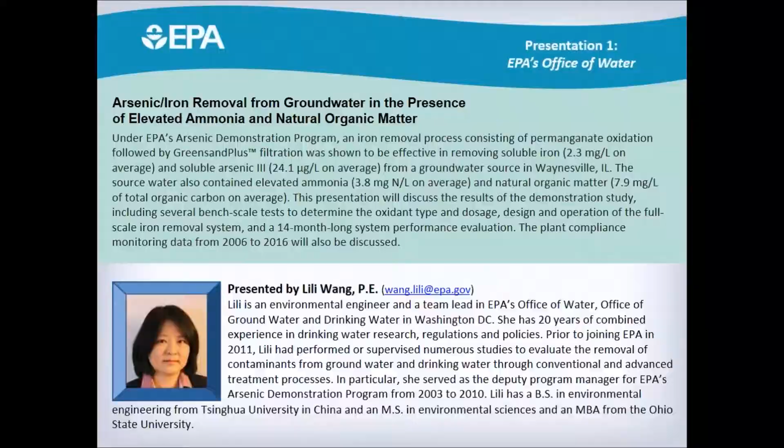Okay, great. Can you hear me, Anna? Yes, I can. Okay, well, thank you very much for the introduction, Tom, and also thank you for the opportunity to speak at this webinar. Congratulations on the successful Small Systems workshop last week. I know there were a lot of good talks, and I looked at the slides and I saw some good talks on the iron and manganese removal given at the workshop.

And so what I'm going to present today is some case studies from the arsenic demonstration program to give you an idea of how some of the optimization strategies talked about last week can be implemented in the field. And this is the work I did before I joined EPA in 2011. So I start off with some background information and the design considerations for how to address ammonia and TOC in the water. And then I will talk about some bench scale tests and a year-long full-scale system performance evaluation study at a site in Illinois. And then I will finish up with some conclusions.

Some of you may have heard about this EPA arsenic demonstration program from previous webinars. It included 50 sites in 26 states, initiated shortly after EPA lowered the arsenic standard from 50 to 10 microgram per liter in 2001. The program took about 8 years to complete, from 2003 to 2011, and its purpose was to help small systems comply with the new arsenic standard.

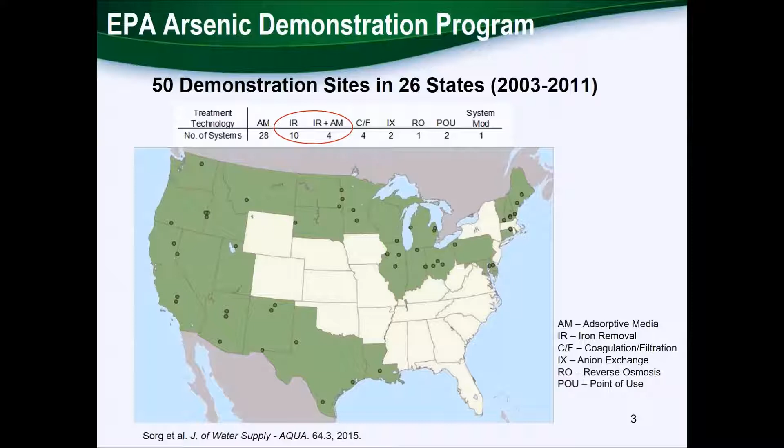Each dot on this map represents a demonstration site. There are a number of different technologies being demonstrated, including adsorptive media, iron removal, coagulation filtration, anion exchange, reverse osmosis, and point of use. As you can see on the top of this map, iron removal is the second most frequently used technology, being demonstrated at 14 of the 50 sites.

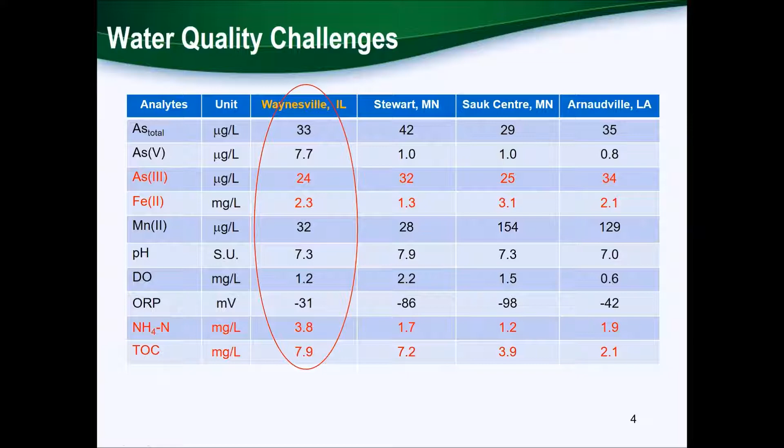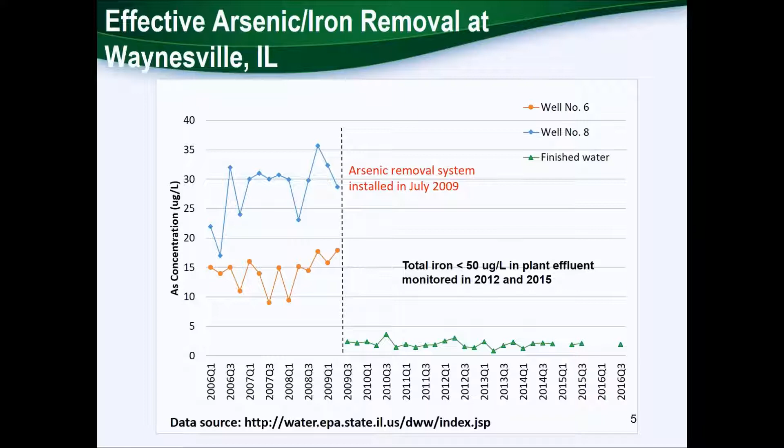Also, the sampling frequency was changed from the previous quarterly sampling to yearly sampling starting January 2015. They also monitor total iron, once every 3 years. So I only have this 2 pieces of data for total iron, but they are all below 50 microgram per liter in the plant effluent, monitored in 2012 and 2015. So the iron removal system seems to be doing pretty well in terms of removing arsenic and iron at this site.

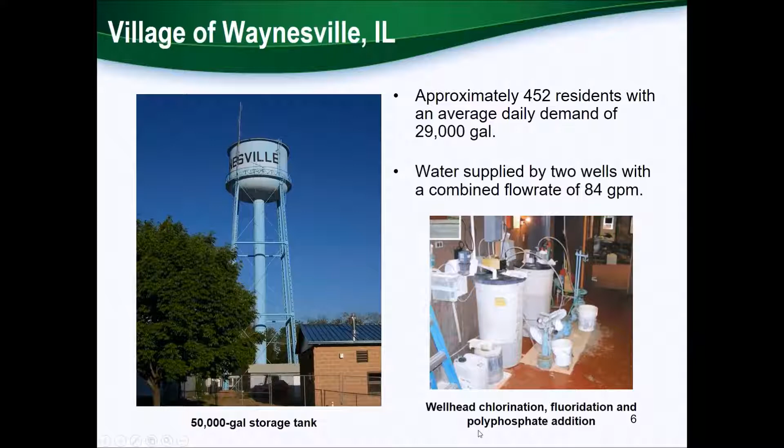So next, I'm going to go into more details about this study. The village of Waynesville, Illinois, has 452 residents with an average daily demand of 29,000 gallons. The water was supplied by those 2 wells with a combined flow rate of 84 gallons per minute. Prior to the installation of the treatment system, they only had wellhead chemical addition, including chlorination, fluoridation, and polyphosphate addition.

This next slide will talk about some design considerations. The first is about what oxidant is good for this kind of water. We all know that air is very effective for iron oxidation - that's why most plants use aeration. However, it's not effective for arsenic-3. Also, because this water contains ammonia, chlorine is not a good choice either, because chlorine reacts with ammonia to form chloramines, and chloramines are not effective for arsenic-3 oxidation either.

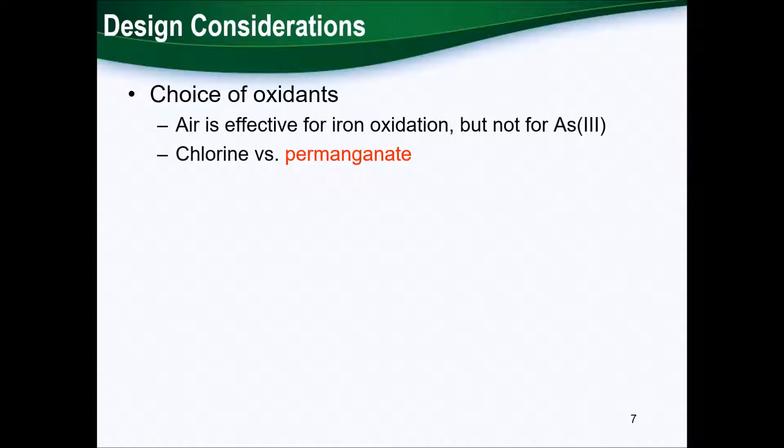That kind of leaves... also, breakpoint chlorination is not practical because the chlorine dose would be very high - at this site it could be as high as 32 milligrams per liter. That could also lead to some DBP formation concerns because the water has very high TOC. So that left us with permanganate, which can effectively oxidize arsenic-3 in the presence of ammonia and also minimize DBP formation.

But permanganate has its own set of challenges, particularly with dosing. If overdosing, then you'll get a pink water issue. If underdosing, then some arsenic-3 and iron-2 may not be completely oxidized. Also, because this water has very high TOC, and TOC would interfere with permanganate oxidation and filtration, it would exert additional demand for the oxidant. But there's no formula to estimate the demand by the TOC.

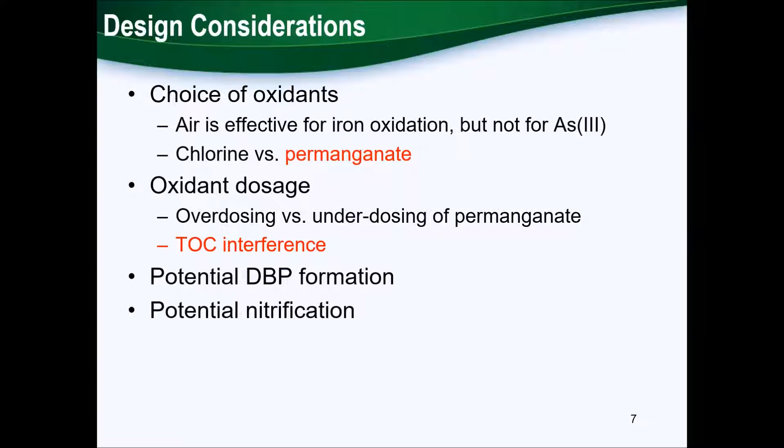In our study, we also purposely avoided aeration to allow arsenic-3 and iron to be oxidized simultaneously for optimum removal. And we also kept the system pressurized to minimize the nitrification.

As I said earlier, we were able to leverage some of the experience from other sites. So I'd like to talk to you a little bit about this Sauk Centre, Minnesota site, which had very similar water quality and also a similar iron removal system using permanganate. We had some very interesting observations here and also learned quite a bit from this system.

Initially, when we started the system, we added about 4 milligrams per liter permanganate, and we were able to oxidize arsenic. We got very good arsenic removal and iron removal. However, we noticed that the manganese level after filtration actually went up—it was higher than what's in the raw water. The raw water had about 150 micrograms per liter manganese.

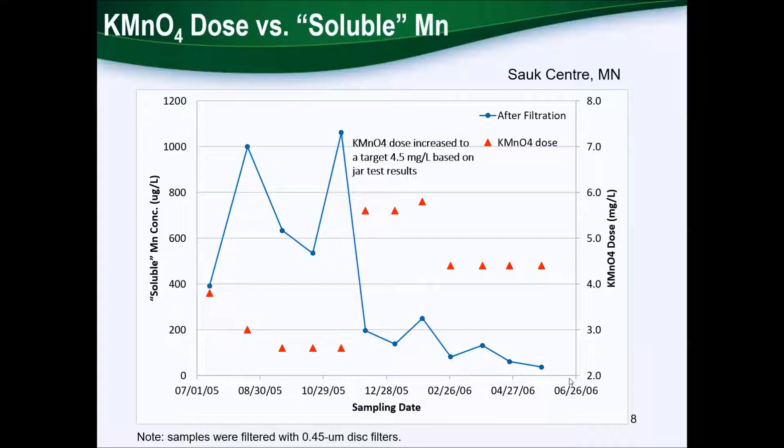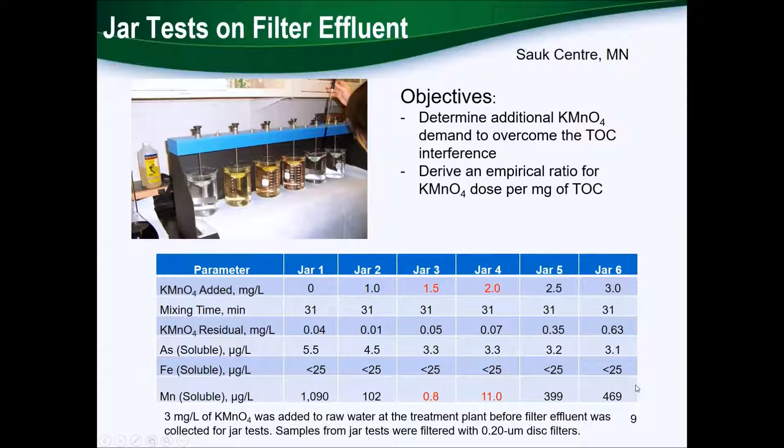So we plotted the manganese data on this graph. As you can see, we determined that the optimum dose for permanganate is between 1.5 and 2; on both sides you're either underdosing or overdosing, and in each scenario you'll have elevated soluble manganese in the finished water. Based on this optimum dose, we also figured out an empirical dose ratio—basically 1.5 or 1.6 divided by the TOC concentration of this water, which is about 4 milligrams per liter, giving us 0.4 milligrams of permanganate per milligram of TOC. That's the empirical ratio we derived based on this water and this jar test.

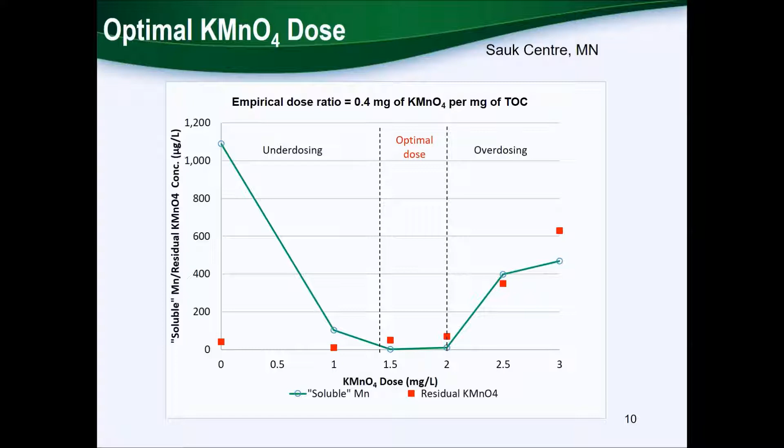We were then able to apply that value to our Waynesville bench tests. For the Waynesville bench test, it's a little different because we did the test before the system was installed to produce any water. We wanted to be more proactive this time, doing the jar test before we start up the system.

So we actually use the bench test to determine the raw water oxidant demand and the proper dose to oxidize arsenic 3 and iron 2, and also to overcome the TOC interference. Another objective is to evaluate the potential for DBP formation.

So we performed this test on site using fresh water from the well. Instead of using the 6-place jar test as we did for the Sauk Centre study, we used 1 liter amber glass bottles as a test apparatus, because we tried to avoid contact with air and preserve that condition.

We also determined the permanganate dose based on the stoichiometric amount. This 2.4 milligram per liter is based on the iron and manganese levels, plus the additional demand by the TOC. We used 0.4, that empirical ratio, multiplied by 9 milligram per liter of TOC, and got 3.6. Adding that to 2.4, we got 6 milligram per liter.

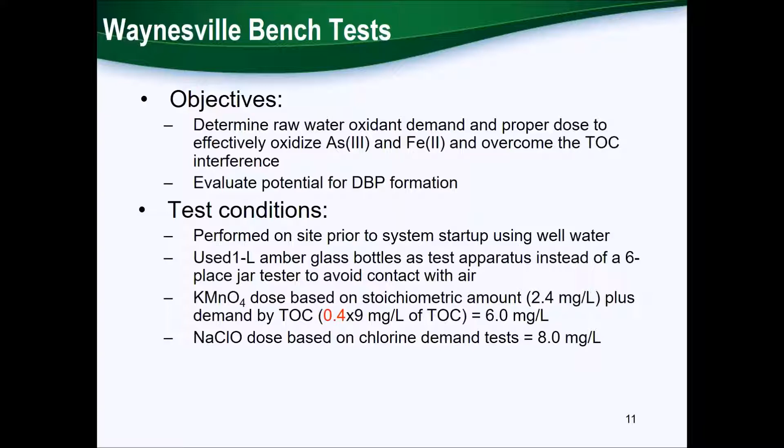Based on those conditions, we did the jar test. As you can see on this slide, we used 20 minutes as a reaction time, but for the sodium hypochlorite we have 2 jars. The second jar is to give more conservative conditions, the purpose being to look at DBP formation, so we used 120 minutes instead of 20 minutes. We also bumped up the oxidant demand from 8 to 10 milligram per liter as chlorine.

At the end of the test, we measured the soluble arsenic. We did arsenic speciation, measured the metal content, and also the DBP in terms of TTHMs and HAA5. As you can see, DBP formation was not an issue for any of these jars.

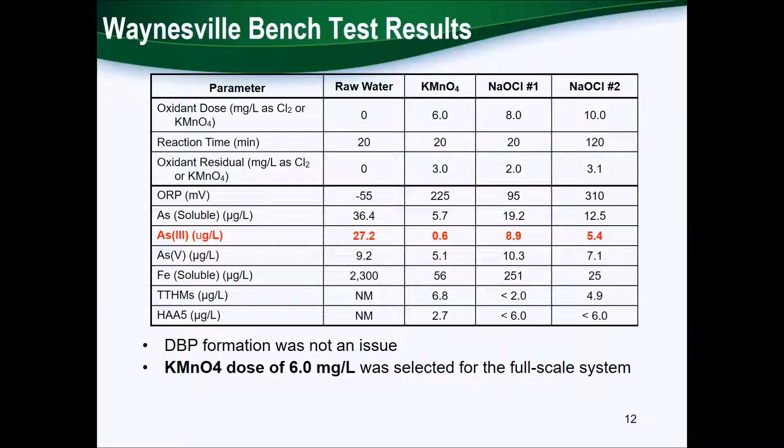The permanganate definitely provides the best results for arsenic-3 oxidation. If you look at chlorine bottle number 1 and number 2, we do have quite a bit of arsenic-3 still existing at the end of the test, indicating that, because this water has ammonia in it, the chloramine forms, again demonstrating that chloramine is not effective for arsenic-3 oxidation.

So with that, I'm going to move on to talk about the full-scale system performance evaluation study, and just very quickly, some pictures of the building construction, and some pictures of the system delivery, offloading, and installation.

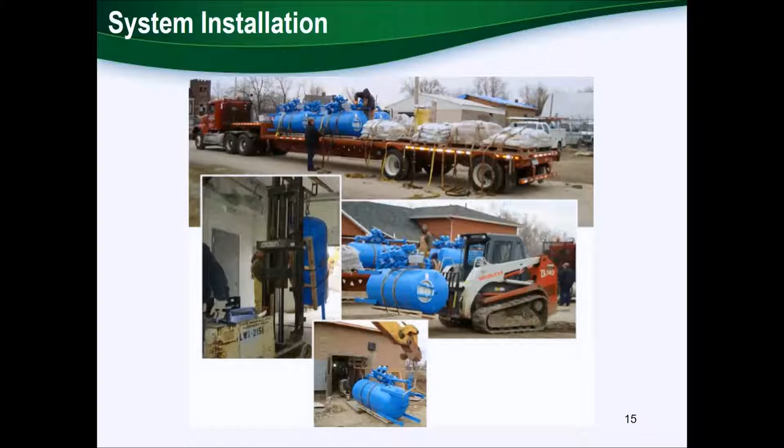The design features: the system was designed at 3.4 gpm per square foot, and it contained 4 vessels, 36-inch diameter by 72-inch tall, and each vessel contained 24-inch of GreensandPlus media, which is basically silica sand coated with manganese dioxide, plus a 12-inch anthracite cap.

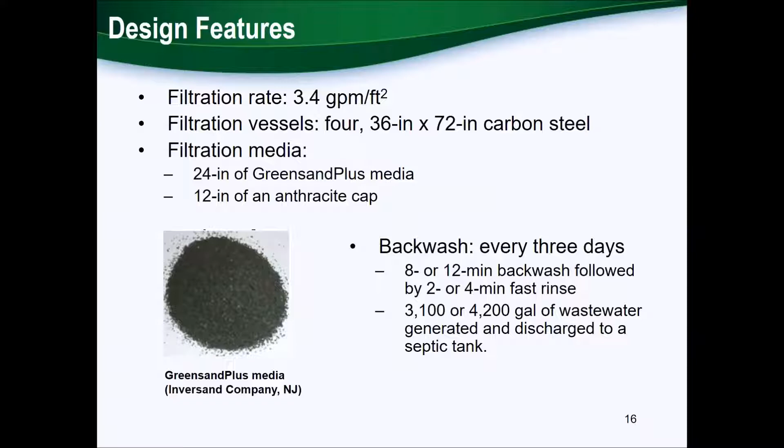Each vessel was backwashed once every 3 days, consisting of 8 minutes of backwash followed by 2 minutes fast rinse initially, and later we extended the time to 12 minutes of backwash and 4 minutes of fast rinse for more thorough backwashing. Each backwash would generate about 3,100 to 4,200 gallons of wastewater, which was discharged to a septic tank on site.

We collected samples on a 4-week cycle. For the first week of the cycle, we did arsenic speciation and a lot more parameters, and for the 3rd week of the cycle, we did just total metal analysis. We also collected samples from the backwash and from the distribution system, but I won't have time to talk about those results.

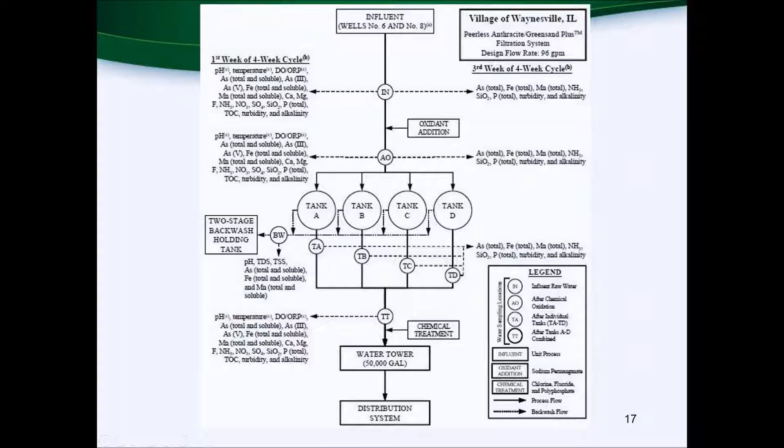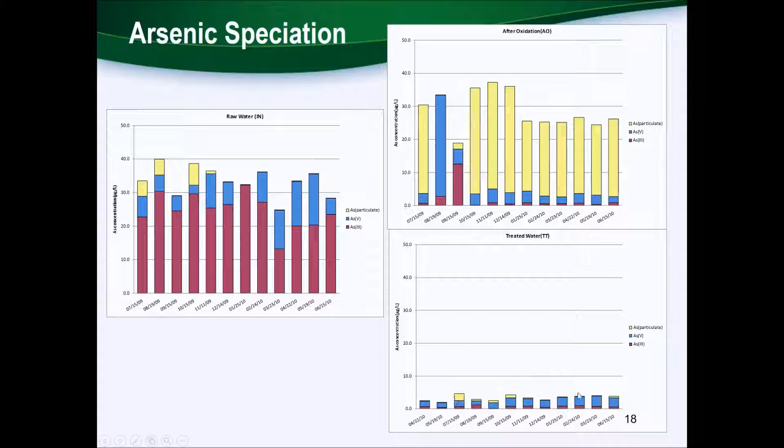This shows the arsenic speciation data for samples collected in the raw water, after oxidation, and the treated water. As you can see, in the raw water, the purple color represents arsenic-3, and the majority is arsenic-3. After oxidation, this yellow color represents particulate arsenic. So the permanganate was very effective at oxidizing arsenic-3 to arsenic-5, and arsenic-5 got adsorbed onto the iron particles. At the treatment location, the arsenic level went down to below 5 microgram per liter.

This graph shows the total arsenic removal; we have a lot more data than the arsenic speciation. Again, the yellow and pink curves represent the raw water and after oxidation, and the blue color represents the arsenic level in the effluent. They're all consistently below 10, and actually below 5 most of the time.

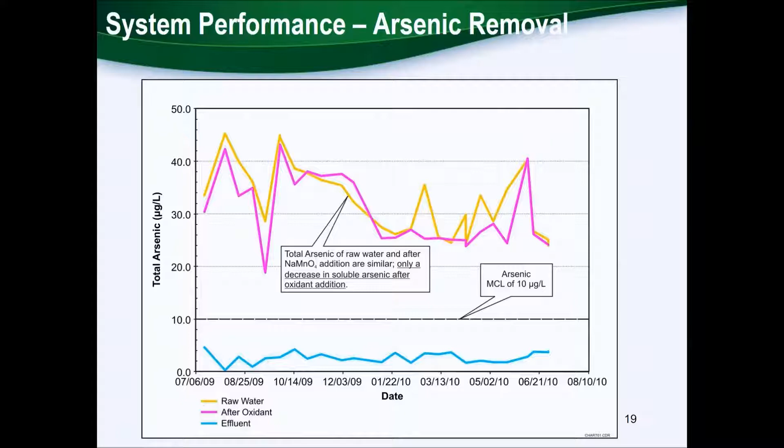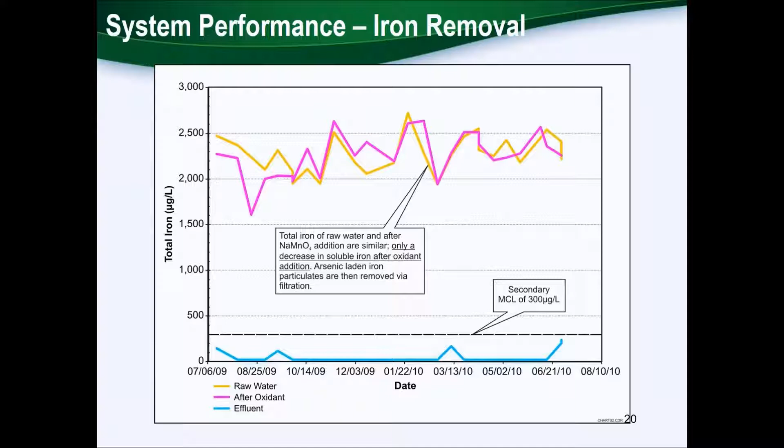And for the iron removal, again, it's very effective. The blue line represents the effluent, and most of the time the iron was below detection of 25 micrograms per liter, just with a few spikes here and there.

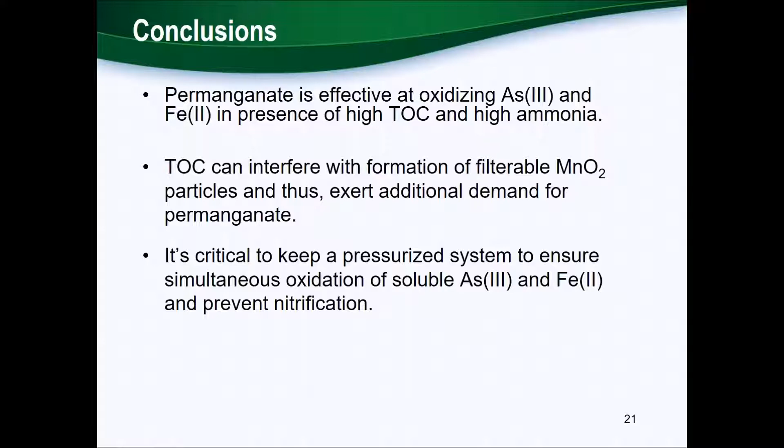I'm going to talk about conclusions real quick. So permanganate is very effective at oxidizing arsenic-3 and iron-2 in the presence of high TOC and high ammonia. TOC can interfere with the formation of filterable manganese dioxide particles and exert additional demand for permanganate. And it's critical to keep a pressurized system to ensure simultaneous

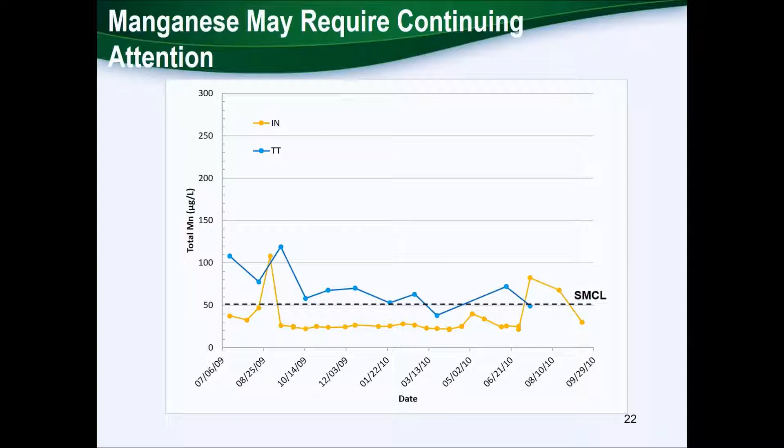We could fine tune the chemical dose or do something else. And I want to use this slide as a segue to Darren's talk about the biological treatment, where I think he had a very good removal on the manganese. So I just want to quickly acknowledge the operators of Waynesville, Illinois, my previous colleagues at Battelle, and also EPA ORD for the funding. Thank you very much.

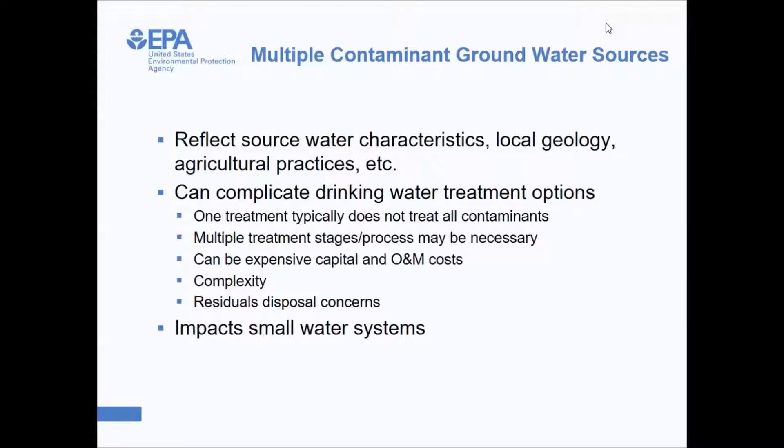So the multiple contaminant scenario that we deal with, I'm going to talk about 4 different contaminants in the same groundwater, but any combination of these could be a challenge in itself. So don't think of what I'm going to talk about as an approach to deal with all 4, but if you have 2 of these or 3 of these, the approach that I'm going to discuss will address any combination.

Ammonia isn't regulated. And for those that have heard me talk over the years, I've been talking quite a bit about ammonia removal and biological treatment to address ammonia removal and why we're concerned about it. It's not directly regulated, but certainly can be a big issue if it enters the distribution system, creating nitrification issues, particularly if the concentration is over 1 milligram per liter, where that 1 milligram per liter of ammonia could go to 1 milligram per liter of nitrite as a result of distribution system nitrification, which exceeds the nitrite standard of 1 milligram per liter.

It can also impact treatment processes. In particular, arsenic removal can be impacted if there's ammonia in the water and you're trying to oxidize arsenic with something like chlorine, which gets tied up with ammonia and forms monochloramine, which is not going to be effective at oxidizing arsenic. So I'll talk about that in a second.

Iron - we have a secondary MCL for iron of 0.3 milligrams per liter because of staining, aesthetic issues, staining of fixtures and faucets and clothes and other things. Red water, as we refer to it sometimes, and it may accumulate contaminants in the distribution system as well. So we want to treat iron and remove it from our water.

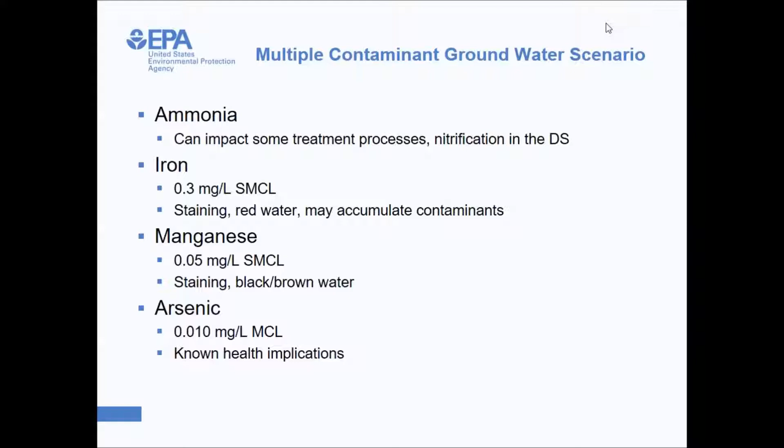So let's look at each contaminant just real briefly and quickly. How do we deal with ammonia?

Well, monochloramine formation is an option, but I would argue that it's difficult to manage because oftentimes ammonia varies in a source water - maybe not so much in the source groundwater well itself, but many communities have multiple wells they draw from, and the wells have different amounts of ammonia, and they're oftentimes switching or rotating combinations of wells. It can be a challenge to keep up with, trying to tie up that ammonia without leaving much of a residual ammonia to go out into the distribution system. And of course, when it does go into the distribution system, it reacts with distribution system materials, corroding pipes and biofilm and everything else that it reacts with. It releases ammonia, so you still have the ammonia out there, and that can be an issue for nitrification problems.

Breakpoint chlorination is certainly an option, but the concern there, particularly with some of the waters we're dealing with now, is they have ammonia concentrations of 2, 3, 4 milligrams per liter - that's a lot of chlorine to add. And then secondly, you raise the concerns of DBP issues. Biological treatment, of course, that's what I'm going to talk about and highlight. And then there are others - ion exchange, RO, other chemical oxidation processes.

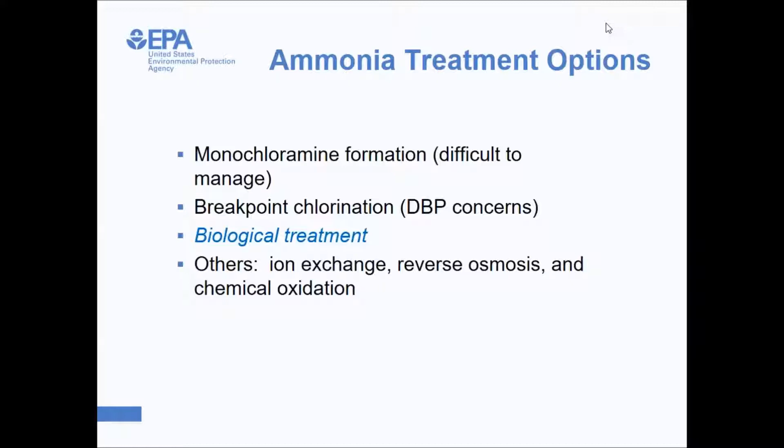I'm not going to touch on those, but they have concerns and issues of their own when treating ammonia. When it comes to iron and manganese treatment, oftentimes when we have these in the water, most of the time it's in the reduced 2+ oxidation states for each, and these are relatively soluble, indicative of the reducing source water qualities in groundwaters that we have in many parts of the country, as Lili mentioned.

These reduced forms are relatively soluble, but can be removed by some approaches, such as cation exchange, for example. But more commonly, at least in the Midwest, oxidation followed by filtration is the preferred treatment strategy. And again, as Lili mentioned, oxygen will be effective for oxidizing iron, but not manganese. So if you have both in your system, you're going to be able to address the iron perhaps with oxygen or aeration, but not address the manganese.

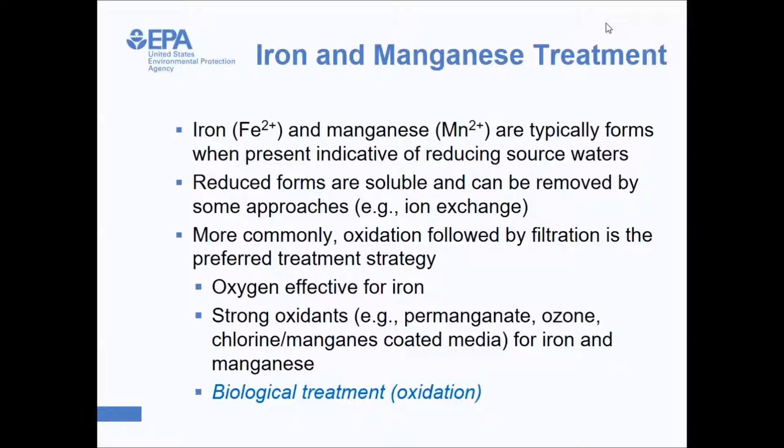In the case of manganese, and of course iron as well, you can use strong oxidants like permanganate and ozone, or in the case of chlorine, in combination with a manganese-coated media. These oxidants can get to the manganese, and in turn also get to oxidizing the iron as well. But again, I highlight biological treatment as a way of addressing the oxidation of each potentially.

Lastly, arsenic treatment. Lili covered this nicely, but when we have arsenic in the water, if you have reduced iron or reduced manganese or ammonia in your water, it's likely that the arsenic is going to be in the reduced arsenic-3 form. But the arsenic-3 form is very difficult to remove. So we recognize that we have to oxidize it to the arsenic-5 state, and we can do that with strong oxidants like free chlorine, permanganate, and ozone.

Now, where you get into trouble is when you're trying to use free chlorine. If you have ammonia, then ammonia ties the chlorine up as monochloramine, and you're not going to be able to oxidize that arsenic-3 very effectively, as Lili has nicely shown.

But once you oxidize it, the ability to remove it through iron coagulation or iron removal, through adsorption processes or anion exchange, we can remove the arsenic-5. But of course, I highlight biological treatment as another option. We've done work on arsenic oxidizing bacteria in the past and published some work on it. There are bacteria that can oxidize arsenic-3 to arsenic-5. And once in the arsenic-5 form, if there's iron around, you'll get removal through adsorption of the arsenic-5 onto the iron particle surfaces, followed up with removal during the filtration step.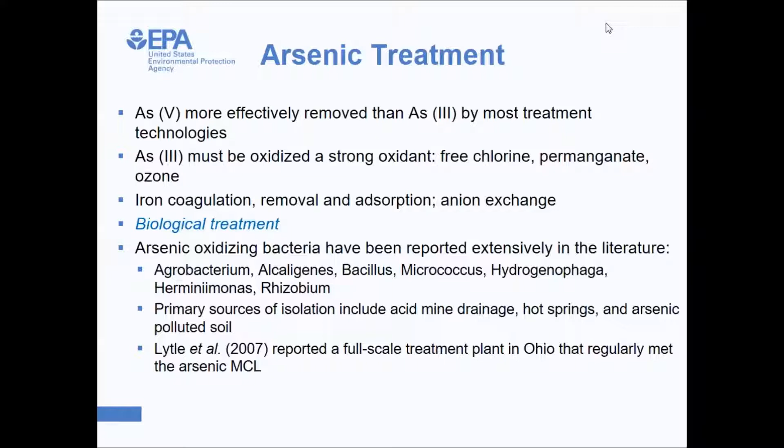So the objective here is that I want to evaluate, and we're going to go through data from an innovative biological treatment approach that we've talked about in the past for just ammonia removal. But look at applying it to removing all 4 contaminants from one groundwater source - that's removal of ammonia, arsenic, manganese, and iron from a groundwater system in Iowa over a year-long period of time.

I'll bring up the difference here between the approach that I'm taking and what Lili has presented nicely. Her situation relies on the fact that oxygen is never introduced to the system. It never has been introduced. And therefore she can take advantage of the fact that the ammonia in that water is never going to be an issue, and it never has been in Waynesville.

Because the ammonia goes out in the distribution system, and because the system's never been open in the past, there's never been enough oxygen to address or oxidize the ammonia and have nitrification problems in that distribution system. So she can get by with adding permanganate to oxidize the arsenic. It would never work with chlorine because the ammonia is still there due to the monochloramine formation issue. But she could apply permanganate to that system and oxidize the manganese, arsenic, and iron with the permanganate, without worrying about the ammonia in the distribution system, because there's no oxygen for it to be oxidized by bacteria in the nitrification process.

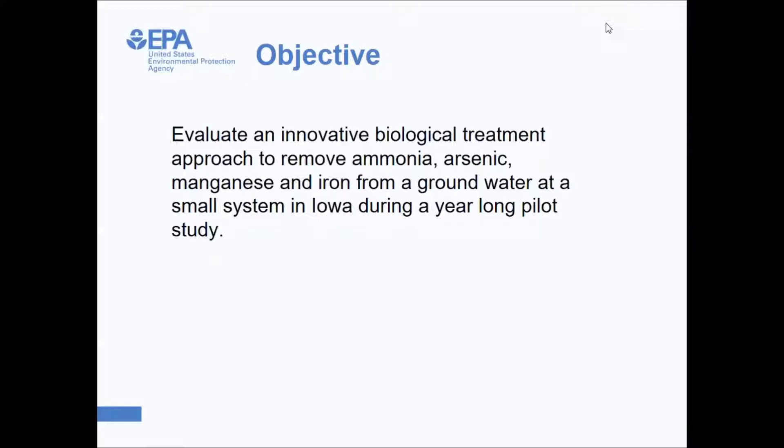So once the system has been opened, we don't want to take the oxygen or air away from it. Okay, so the water, the source water.

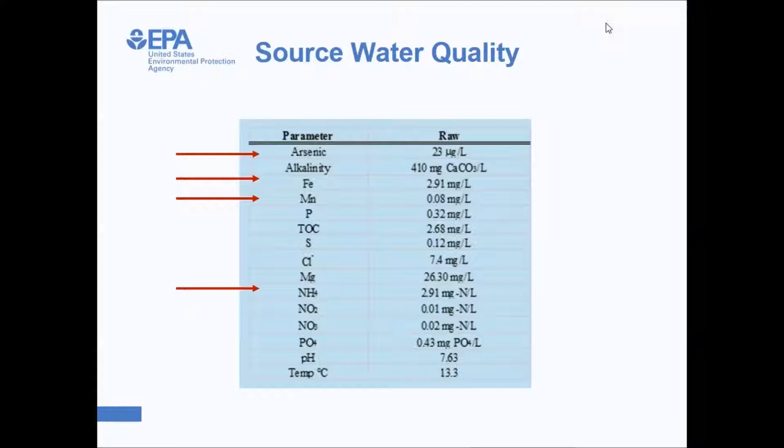The approach in this community - a small community in Gilbert, Iowa, with a population of about 1,000 - and the approach we're taking, I've talked about this approach quite a bit on just addressing ammonia, is the idea of a two-stage system: an aeration contactor, followed by a conventional dual granular media filtration system. So really the main part of the work is done in the aeration contactor, and really what that is simply...

...an aerator. Air is introduced from the bottom through gravel, and the gravel serves to support biological activity, biological growth. Bubbles continuously run up through this contactor as water is going up through it concurrently, or it can be the opposite direction in terms of the flow of water and air, but we typically run both the water and the air bubbled up from the bottom of the contactor concurrently together.

What happens is that contactor is always saturated with oxygen, and there are oxygen requirements, particularly with ammonia. For every milligram per liter of ammonia, it takes about 4.5 milligrams of oxygen to oxidize it biologically - and that doesn't even take into account kinetic constraints and other things. On top of it, we have iron, which can also be oxidized by the oxygen coming up through this contactor, and then any other biological activity that may be important in manganese and arsenic oxidation.

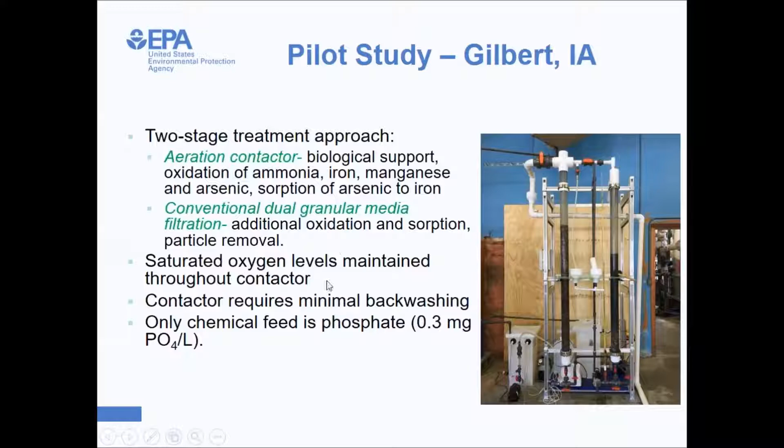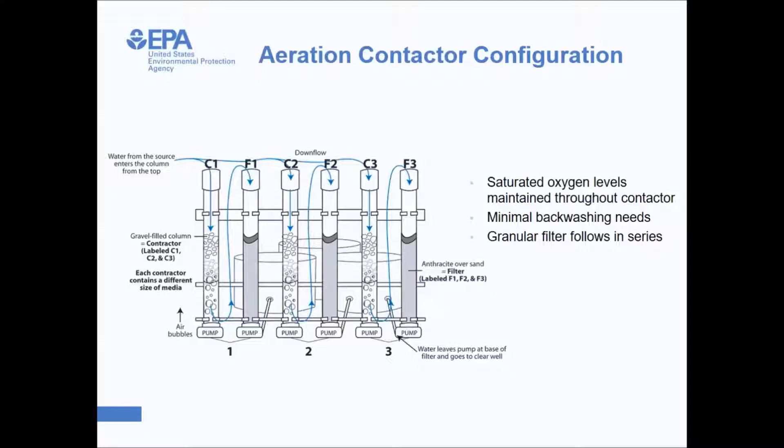In this system, we backwash once a month. But typically, because particles aren't building up, we don't build up head loss and things like that to warrant more frequent backwashing than that.

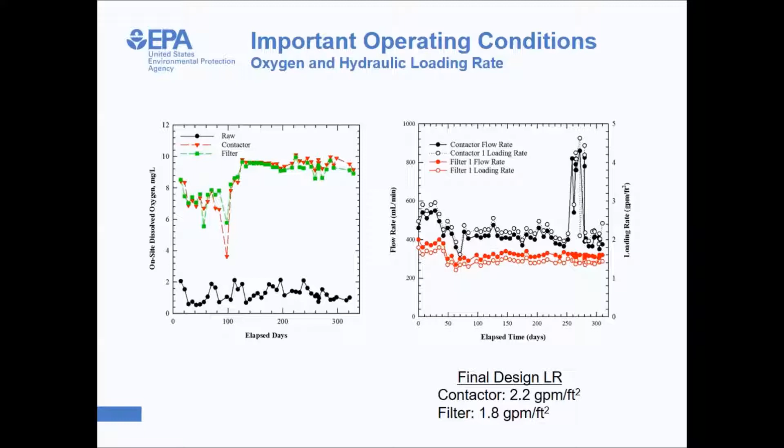And then lastly, the filters. The filters are operated at something lower than 2.2 gallons per minute per square foot. We used 1.8 gallons per minute per square foot. With the pilot, it's difficult to control the flow rate going through the filters, and we did have some instances where the filters went dry on us, because if there's any disruption to the contactor flow, it affects the filters and they might run dry for a brief period of time. So as a safety caution, we operated at 1.8 gallons per minute per square foot, a little bit lower again than the contactor. So let's start to look at some data.

Well, yeah, I've got this bar on my computer, but that's okay. I can look up the screen.

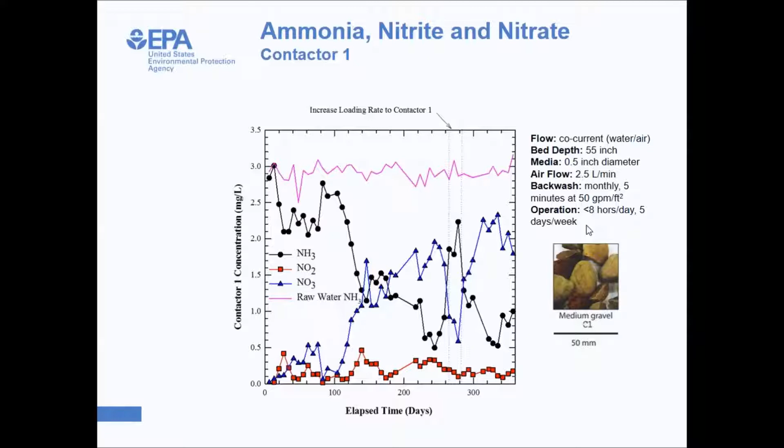Okay, so let's look at the filter. The filter backs up the contactor, so what leaves the contactor goes onto the filter, and you see a continuation of continued biological activity in the filter. The filter is full of 40 inches of media: 10 inches of anthracite, over 30 inches of AdEdge's ADGS silica sand, which is a manganese-coated material, and it's backwashed every 24 hours of operation, or about every 3 days.

What we see here is that nitrite and ammonia levels continue to improve as it comes through the contactor and leaves the filter. Again, until we get to about 120 days, once we establish the loading rate and the oxygen concentration, the ammonia levels are quite low, typically less than 0.1 milligrams per liter or so, up until the point where we double the loading rate. When we double the loading rate, more ammonia is going onto the filter, and it can't handle it all, so we see a spike of ammonia come out during that period of time.

More evident in the filter is the nitrite concentrations, and I think because we have more surface area in the filter and more biological activity, that nitrite peak becomes bigger. It jumps up to just over 2 milligrams per liter, but then it drops off rather quickly. It bounces around during the first 100 days or so, again because the oxygen concentration is not where it needs to be, and the loading rate is a little more rapid than it needs to be coming out of the contactor.

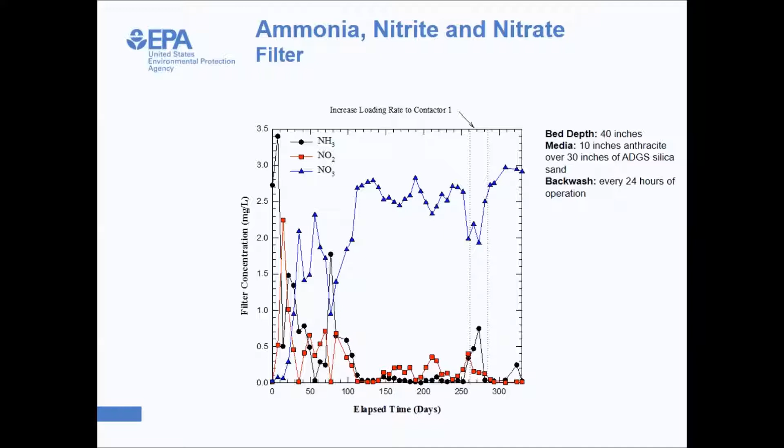So the filter does the job, takes care of the rest of what's coming in, with the exception of when we double the loading rate, then we have a little bit of degradation. The removal is somewhat impacted, but it comes right back once we change the loading rate back to the original. The loading rate in the filters were not changed, it was just the contactor that was changed. We did add a second column, because my hope is always that we get all the removal of ammonia performed in the contactor.

So a second column was added. This time, though, the column had 3 sample ports in it: one at 25 inches into the bed—remember this is 55 inches of total bed depth—another at 37.5 inches above the bottom, and then at the very top, exiting the media, was another sample port.

This is looking at time versus concentration, with ammonia in red, nitrite in orange, and nitrate in yellow.

Again, here the difference is the media diameter in the bed. In this case, the media was 0.25 inches, so this is going to give us a lot more—approximately double our surface area in the contactor, giving us more area for the bacteria to grow on.

And sure enough, what we saw is that at the bottom, things take off the earliest since it's co-current, and by the time we get to 100 days, that's about what we expect, because typically, based on past experience, it takes about 30 days for complete nitrification if a bed is operated 24/7. Given that we're operating a fraction of that—8 hours a day, about a third—it takes about 3 times as much time to acclimate.

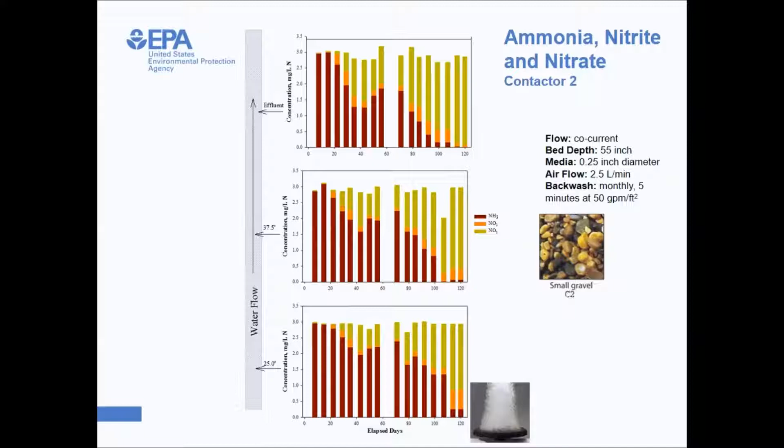Iron and manganese removal—let's run through these fairly quickly here. Contactor 1 and 2, and then the filter. Iron manganese—iron concentrations coming in are shown in black.

One interesting thing we found, both in the case of iron and manganese, is that we actually had significant removals of both in the contactor, which never created a reported problem. We just backwashed it at a monthly rate, and that seemed to be fine—never saw any problems with it.

So it did get removal, and the bottom line is that through the filter, iron levels were basically at the detection limit throughout, with the exception of a little blip during the time where we increased the loading rate. Similarly, manganese—same thing.

We saw an enhanced removal of manganese in the contactor. It was disrupted during the increased loading rate, and it was also disrupted in the filter when we were operating under lower oxygen concentrations and higher loading rate in the contactor. So, like ammonia, oxygen is very important when it comes to manganese removal.

But once we got through that period of time, manganese levels, with the exception of one point where a spike came up that corresponded to the iron spike, showed very good removals—typically below 5 micrograms per liter or so. So presumably this is all biological activity taking place, oxidizing the manganese in place in the filter and in the contactor.

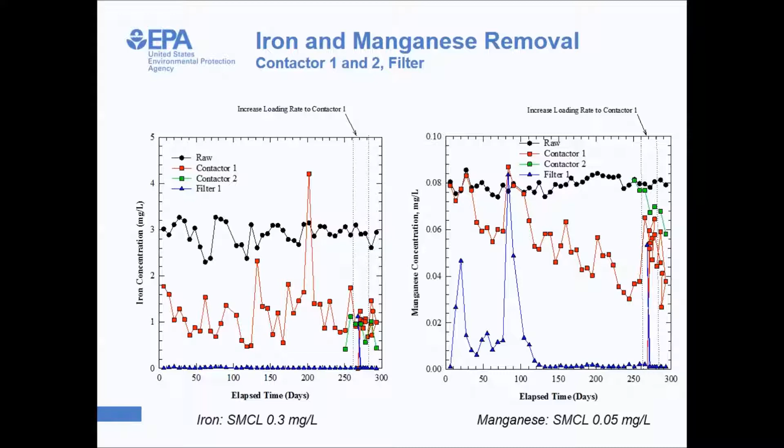Arsenic removal—this is looking at arsenic removal in the contactor and the filter. Again, if you remember, arsenic concentrations in the raw water were about 23 micrograms per liter, largely arsenic-3 as opposed to arsenic-5. Coming out of the contactor, we're seeing a transition of arsenic from arsenic-3 to arsenic-5. Some is being removed with the iron, so we don't have 23 coming out—we have a total of somewhere between 10 and 15 micrograms per liter coming out. But what's coming out is dominantly arsenic-5, so it's being converted as it comes out of the contactor.

And then as we go through and look at what's coming out of the filter, it's all arsenic-5 coming out of the filter. This is all dissolved, not particulate. This is ICP-MS analysis, focusing just on the dissolved form of arsenic.

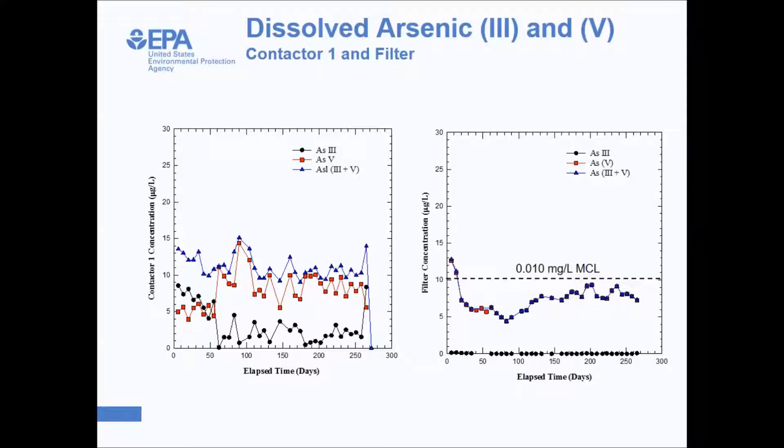So again, we're getting removal, and it's being converted along the way. We attribute that to arsenic oxidizing bacteria, and then that arsenic, as it's converted to arsenic-5, attaching to iron particles and being removed as iron is being removed.

And then lastly, we're looking at total arsenic here, for contactor 1 and filter. We also have some contactor 2 data, but let's focus on contactor 1. This includes arsenic 3, arsenic 5, and particulate arsenic, done by ICP-AES.

And again, we see removal of arsenic. This is the raw water in black, and then what's coming out of the contactor. There's been a reduction, and then a further reduction as it comes out of the filter.

And we do have a few points that are above the 10 microgram per liter standard. Not very many, but we went back and started to look at this, and we're going to need to take a closer look. I think there were a number of times when the filters went dry, and we think there may be some correlation with filters going dry and particulate removal of arsenic. But we need to look into it further.

But for the most part, in the majority, over 80%, 85% of the time, we're removing arsenic levels below the MCL, and when it is above, it's just barely above. So we need to look a little bit more closely at that, but for the most part, good removal of arsenic as well.

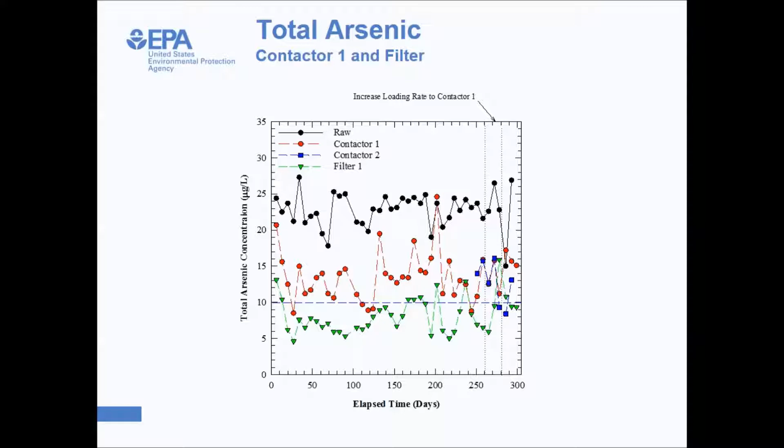Last two slides, I just want to throw up alkalinity. The only reason I bring up alkalinity is because theoretically, the amount of alkalinity consumed is related to ammonia removal. The biology uses inorganic carbon for cell production and growth, and so theoretically 7.1 milligrams per liter of calcium carbonate is consumed per milligram of ammonia as nitrogen, and that's about exactly what we see.

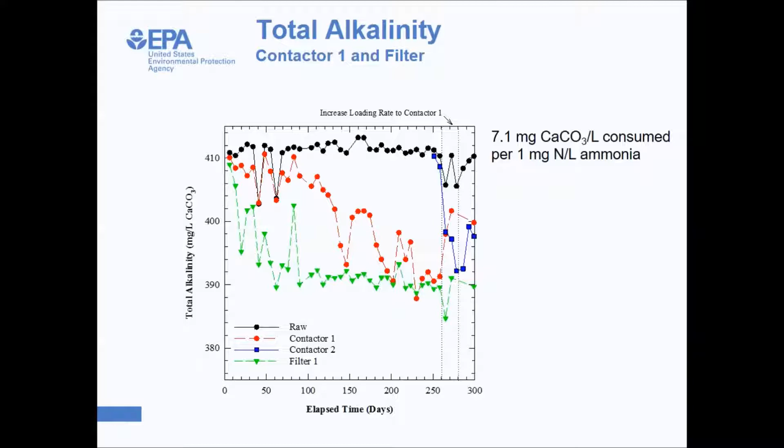We've got about 3 milligrams per liter of ammonia being removed, so that's about 21 milligrams per liter of alkalinity, and it's about roughly exactly what we see when we're at our ideal state between the raw and the finished water. I always throw that up there because it's so amazingly on. Every study we've done, it's always right on.

And lastly, HPCs, this is a biological treatment process, and there are going to be bacteria coming out of both the contactor and filter. For those interested in the biology of things, we certainly want to do some molecular microbiology to understand what's going on in the system, and we're actually going to do that pretty soon, but we haven't got to it yet because of cost and things. Anyway, here's the microbiology of the system.

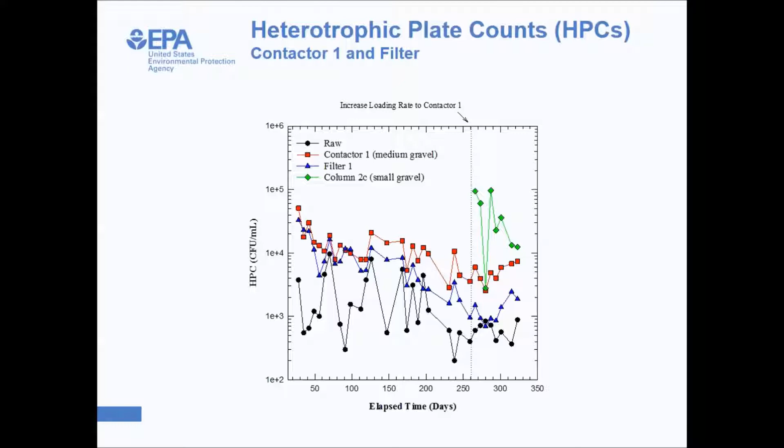So I'll wrap it up, since I know I'm running out of time. Arsenic, iron, and manganese removal all have primary or secondary MCLs, and ammonia is not regulated, but I think you all understand the importance and significance of that. Aerobic biological treatment can be relatively simple, and I didn't get into how simple it really is, but it is very simple and reliable once you get things going.

This system shut down, it dried out, we shut it off for a week, and it turns right back on again, very reliably, removing the contaminants of concern. Media size, loading rate, nutrient addition, and oxygen levels are very important in the design. It's robust and is a viable and cost-effective treatment technology that can be suitable for small systems. And I think I'm going to wrap it up right there.